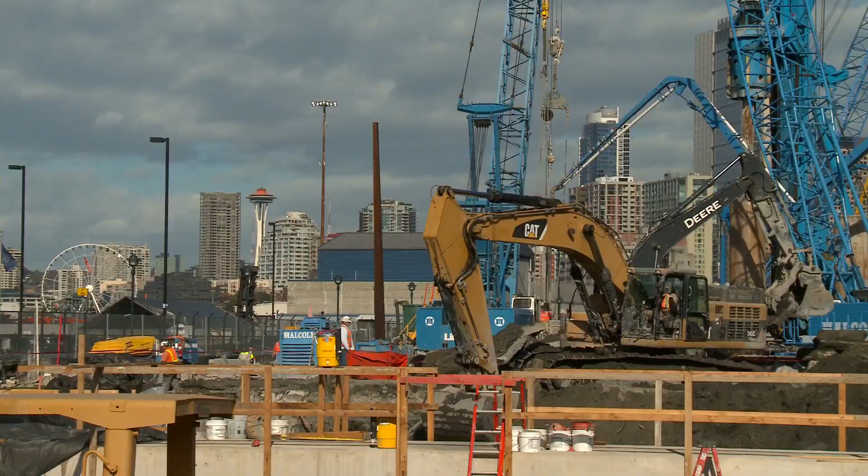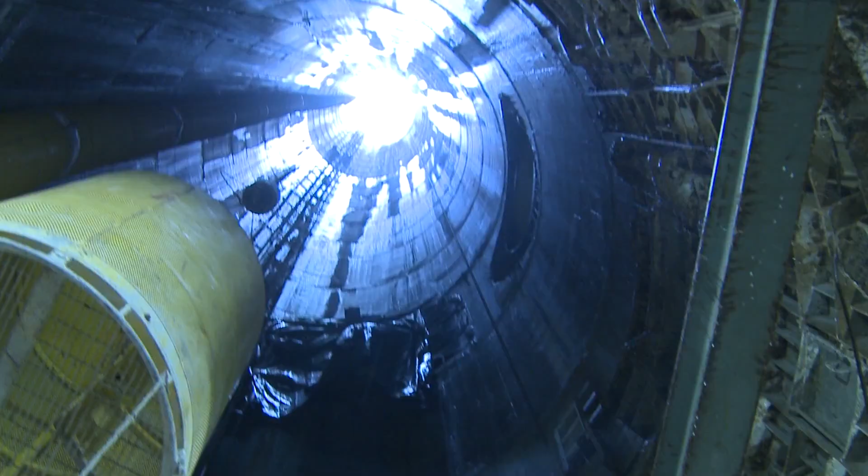It is expanding to move millions more people in New York City. It is transforming Seattle's waterfront and making the city more resilient to earthquakes. It is restoring water quality and addressing rising river levels in Washington, D.C. And it is supporting new development in Austin, Texas. It is the underground, and for young engineers looking for a dynamic, challenging career, it is the future.

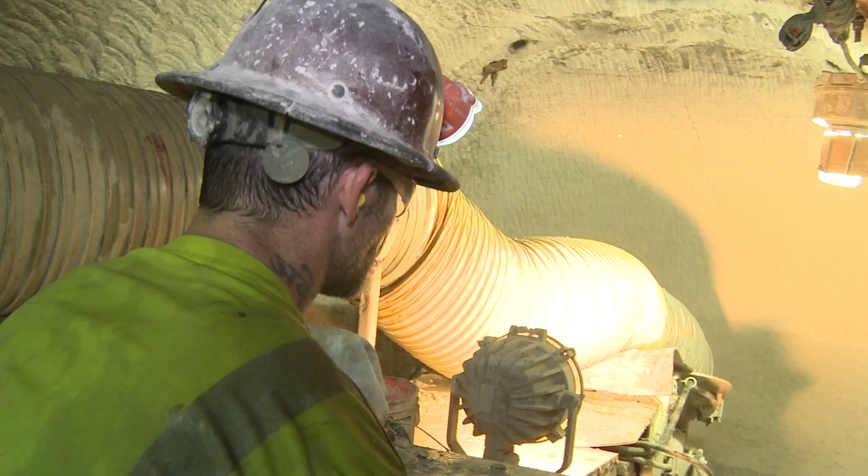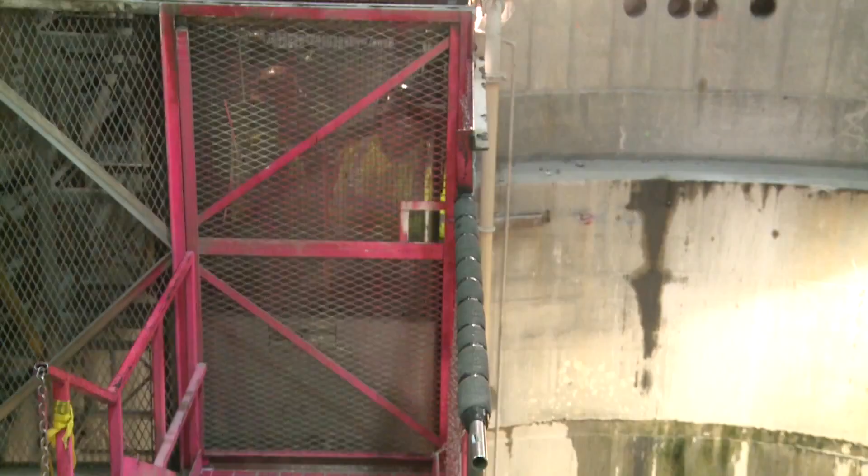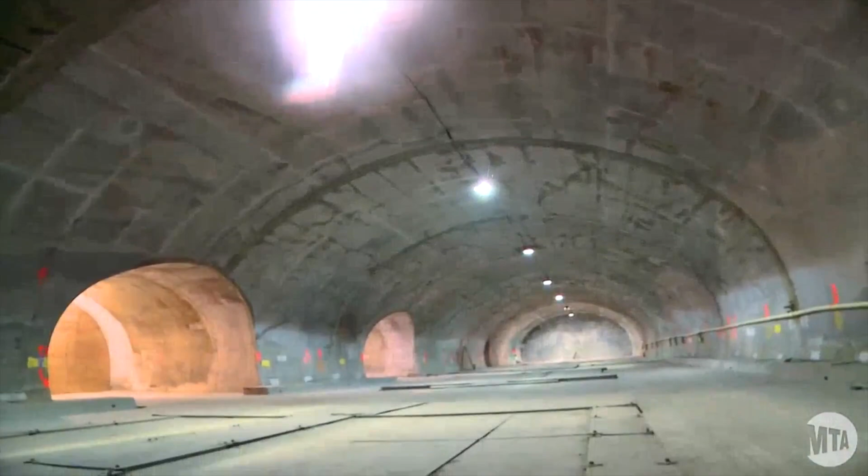The underground construction industry is booming, creating an unprecedented demand for engineers in the USA. Whether it's to clean up our environment, whether it's to move people, to improve our infrastructures, the needs are just tremendous. The last company I was at, through the economic downturn, our underground group grew 20% a year, every year. The projects are ever more ambitious.

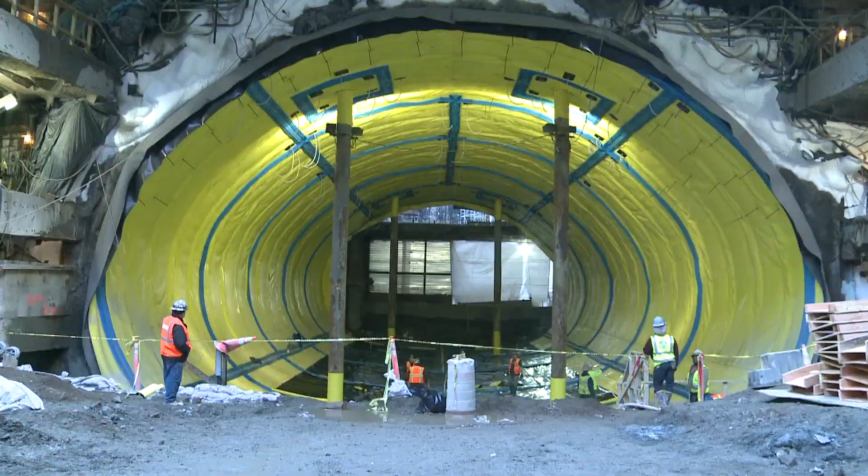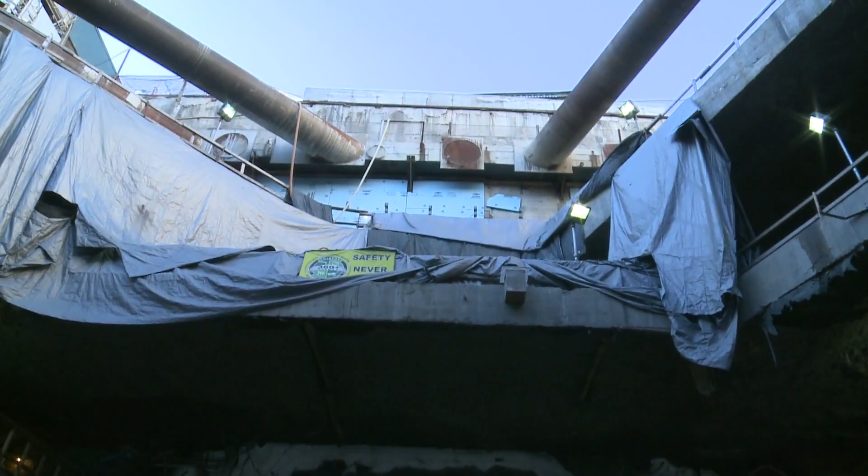A multi-billion-dollar expansion of New York City's subway and commuter rail means tunneling under some of the most expensive real estate in the world, sometimes in ground requiring elaborate ground freezing to support excavation under an existing subway tunnel, a busy roadway, and an elevated track, all stacked above. Plus nearby buildings that have to be supported for any potential settlement as well, very, very near the foundation of the work. So pretty complicated.

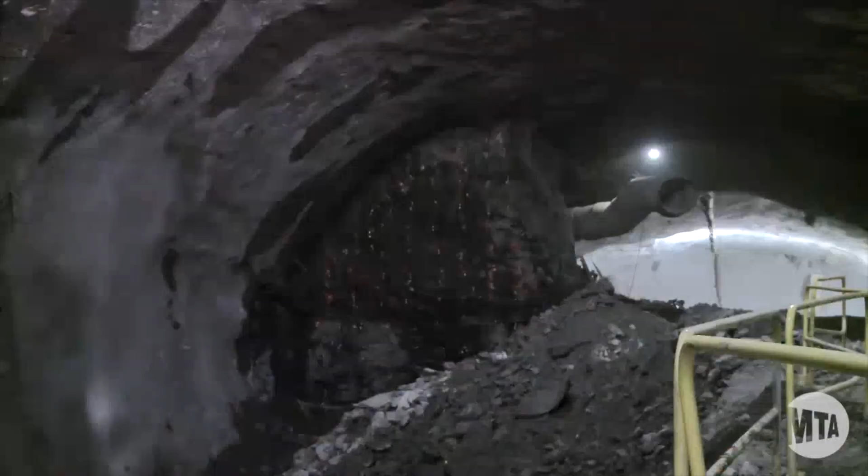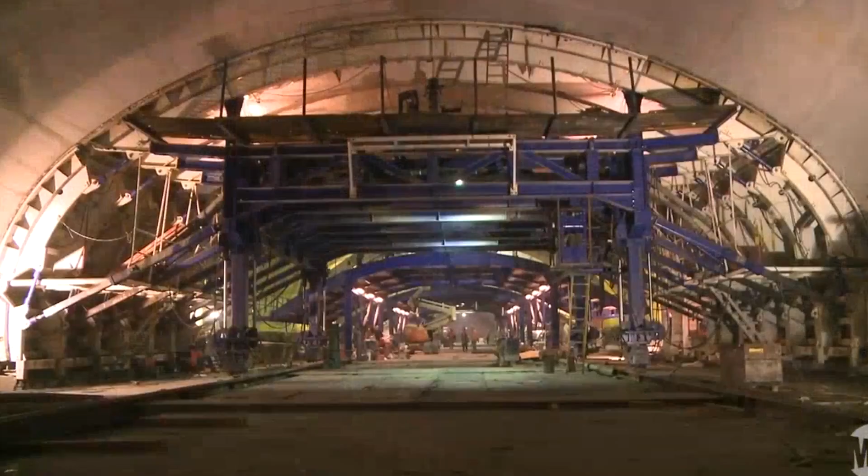And building the entrances to new stations in the basements of skyscrapers. And blasting enormous station caverns, all without interrupting life on top. We've excavated almost 1 million cubic yards of rock with no one knowing. Massive structures. They're 60 feet by 60 feet by 1,200 to 1,400 feet long.

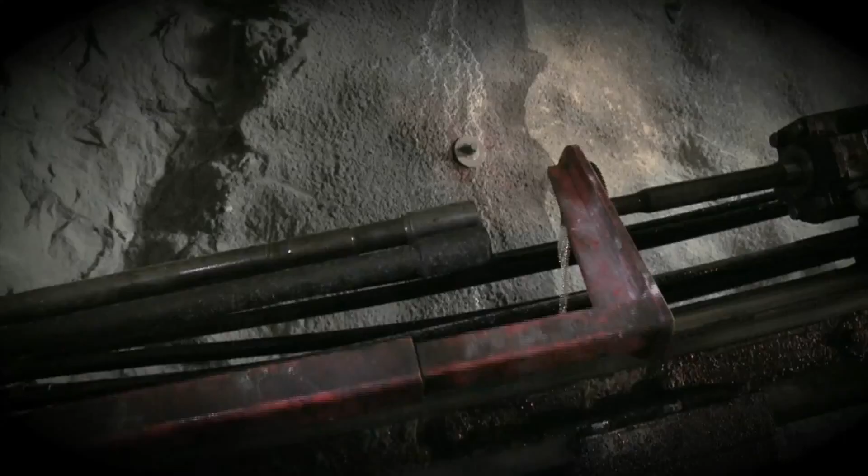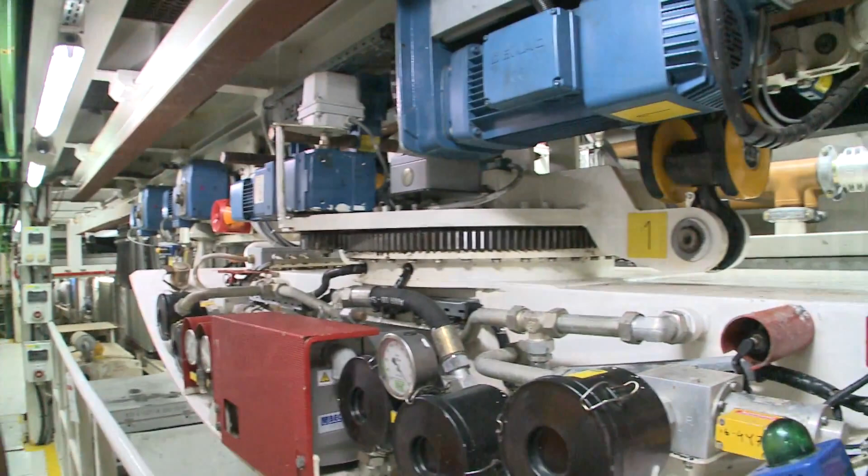New advances are constantly pushing what is possible. Many more sensors on the equipment, speed sensors, temperature sensors, proximity sensors. There's computer-controlled equipment, drills that you can enter the drill pattern and the booms will move by themselves. Not to mention today's tunnel boring machines, or TBMs, computer-guided underground factories that can bore through virtually any ground, erecting the tunnel liner as they go.

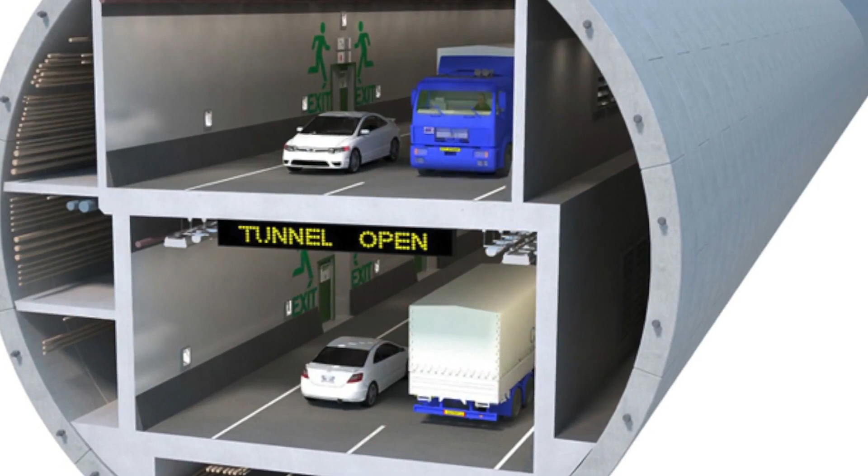The largest TBM in the world, with a cutterhead more than 5 stories high, will carve a double-deck highway tunnel under downtown Seattle to replace the structurally unsound viaduct above. Today, the machines are submarines. We have the ability to go virtually anywhere with these machines safely and effectively. We're going to be able to put tunnels where we didn't before.

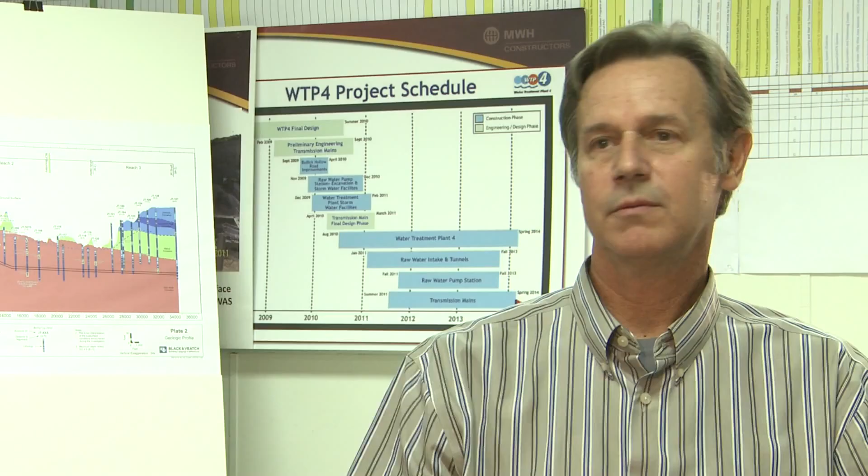We're going to be able to put them bigger and deeper, make them more livable, make them more adaptable for multi-uses. When you look to the future, you'll be in new places that we would have considered impossible at this time. The scale and scope of the projects are demanding greater skill sets from young engineers. They're eager, they want to be there, they're bright, and they soak it up like a sponge.

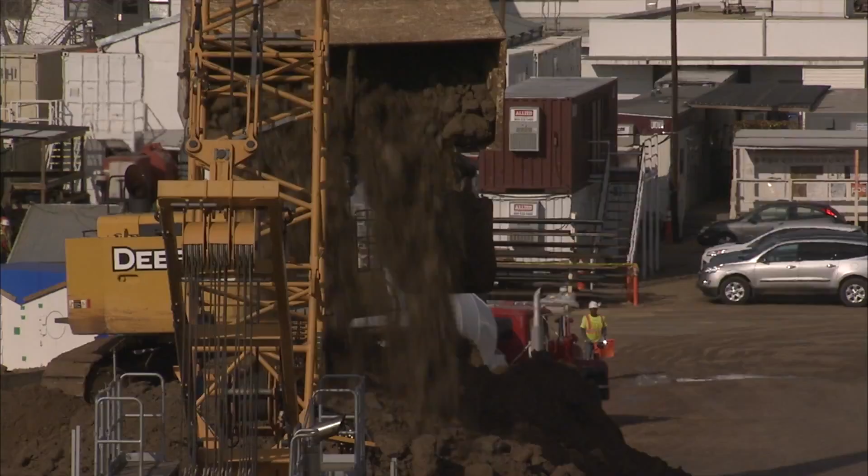What are the major construction activities? What I do on the project is put together the project documents for the job, all the preliminary engineering plans, the specifications, help run the procurement part for the project. Skills applied to a massive clean rivers and flood protection program in Washington, D.C., with more than 12 miles of tunnels and underground construction that will prevent millions of gallons of untreated sewage spilling into the Potomac River and Chesapeake Bay each year.

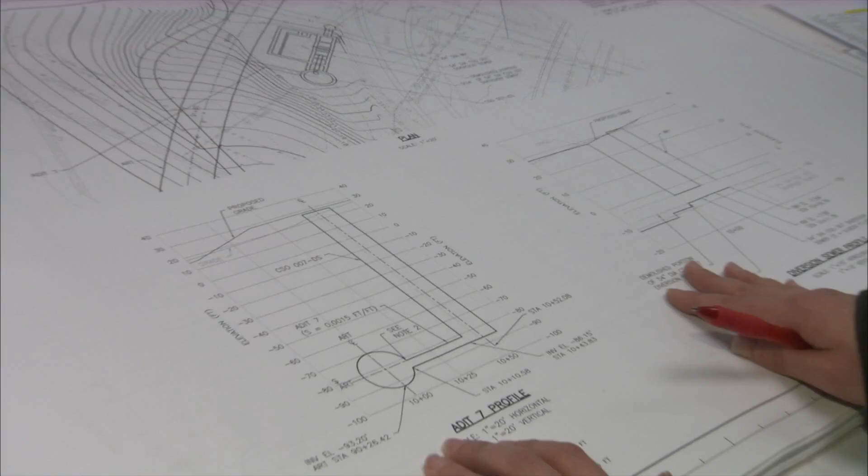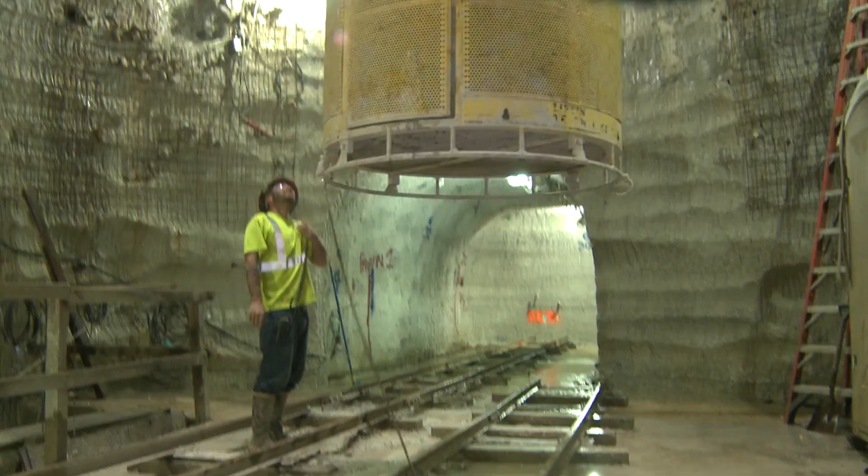And you not only are just designing a tunnel, there's shafts, there's supportive excavations, there's mechanical, there's electrical. On the project that I'm working on, there's a lot of hydraulic engineers, so you have to understand what they need. The same is true for a major new drinking water treatment plant and distribution system in Austin, Texas, that has the added challenge of tapping into a lake.

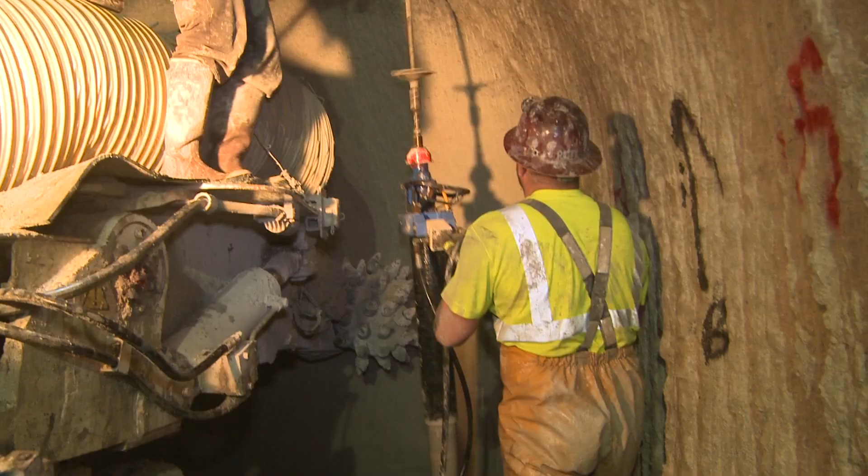You can imagine you're trying to connect a tunnel to a body of water with people working in the tunnel while not flooding the tunnel during construction, but being able to flood the tunnel when it's ready for operations. And the techniques that are used for this are just absolutely fascinating. Through scholarships and its conferences, the Underground Construction Association, or UCA, encourages young engineers.

Be vocal about your interest and reach out to UCA members, because I think everybody in the industry is supportive and welcoming. You get to network and speak with and be known by the major players in the industry. And I think it's really important for young people to get involved in doing that networking and attending some of those conferences. The technology and the trials, the tribulations, and the triumphs that are shared are great.

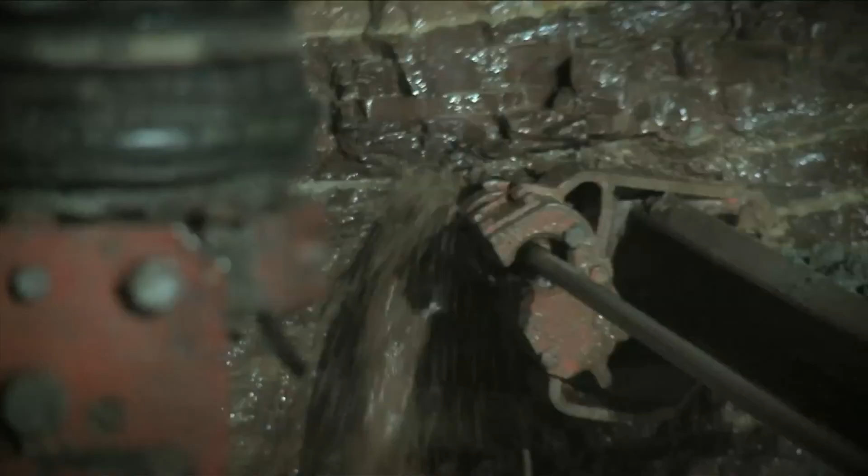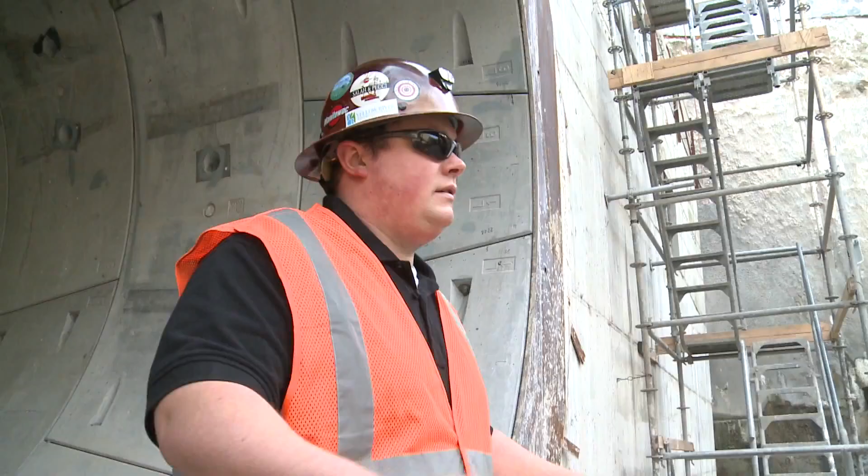The opportunities and possibilities for the underground are endless. Nothing against classical geotechnical engineering, but tunneling to me is just so much more interesting. It's very, very gratifying. It takes time and money, but you can do anything. It's a fabulous opportunity for a very rewarding career.

Every time I go underground, I'm hooked, especially when we're advancing tunnel, when we're excavating. There's lots of opportunity. It's a very exciting industry to be in. I love it. I love the guys I work with. It's fun to go to work, but I've been doing it for 43 years and it's still fun to go to work. So where can the UCA and the underground take you?